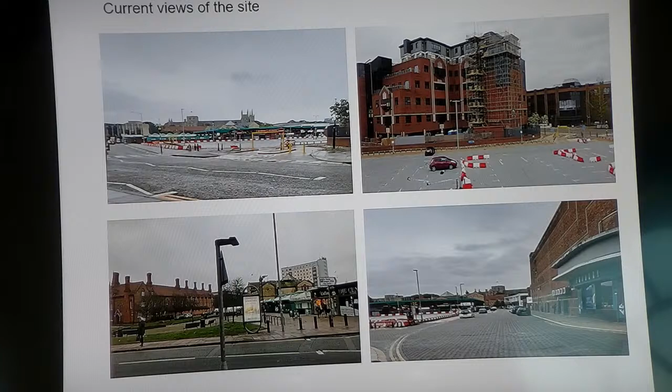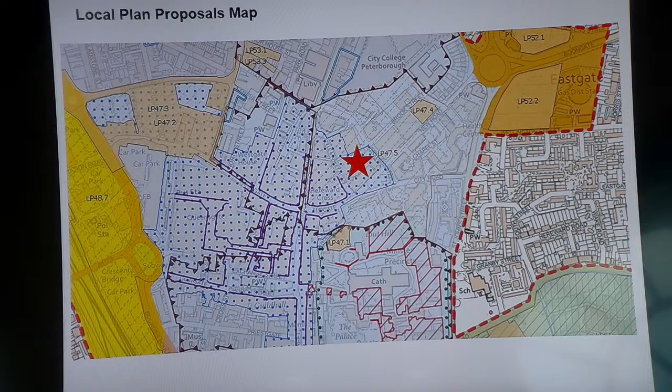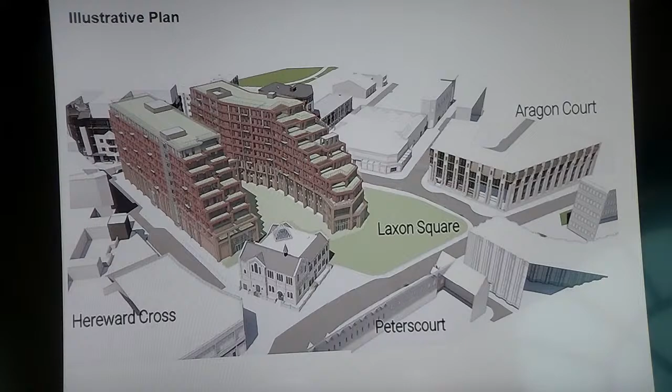This illustrative plan is displayed to give you an appreciation of the form of the building before we look at it in more detail. What you can see here is that the proposed new building, although this is illustrative as it is an outline application, would comprise two wings, with a stepped elevation, stepping from north to south and reducing in height. The stepped nature of the development would allow for terraces to residential flats and also to roof gardens.

This next slide shows a vertical limitations parameters plan. As mentioned before, this is an outline application with only access for consideration at this point, in addition to the principle of development. Further details of scale, massing, landscaping and materials will follow through subsequent reserved matters applications. But in order to control the height and limits on the height of the building, the applicant has submitted a parameters plan, setting out the maximum height of the building and also the number of stories.

This plan shows that it would be a 10-storey building with a height of 33.25 metres. There would be an increase to accommodate the lift and the headroom for the lift, giving a maximum height at that point of 35.25 metres.

In the plan, the very dark blue squares on the roof represent the areas for lift shafts and the headroom to accommodate those. The blue areas they sit on represent the maximum 10-storey height, 33.25 metres. Connecting the two wings of the building would be a three-storey element, 11.2 metres.

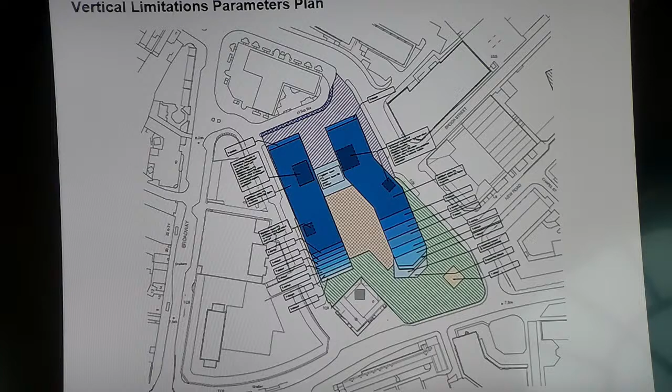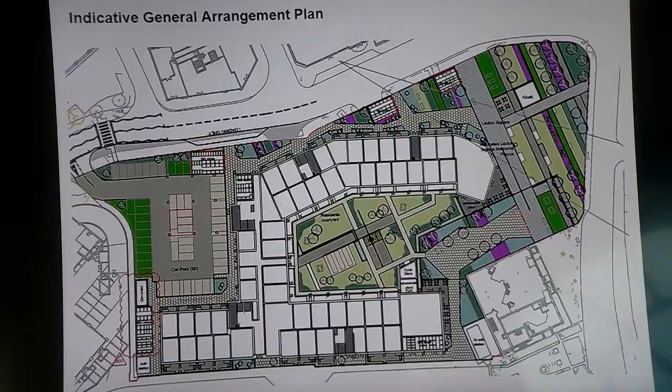I'd also point out that this application includes a range of different housing types: 20% one-bedroom flats, 27% two-bedroom four-person flats, 25% two-bedroom three-person flats, and then some larger units - 15% three-bedroom flats, 7% townhouses, and 6% maisonettes. This differs from other flat developments within the city centre, which predominantly tend to only provide one or two bedroom flat units.

Okay, moving on to the next slide. I'm now going to take you through a number of cross sections and views that look to assess the building heights as part of this development.

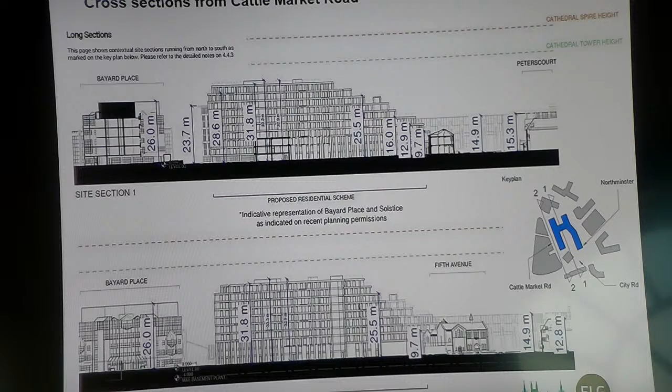The first slide shows a cross section including the existing development we saw in one of the aerial photographs, known as Bayard Place. On the top part of the slide, that's the building located to the left. You can then see the proposed development stepping down in height towards Laxon Square.

For those listening closely, the heights on these drawings show that the maximum height of the 10 storeys would be 31.8 metres. On the parameters plan I showed previously, the maximum height for 10 storeys would be 33.25. These plans are showing an illustration of the development - the fixed points in terms of height relate to the parameters plan, and a slightly different height has been shown here as this is illustrative, with a little leeway allowed within the parameters plan should each individual storey height change slightly. Over a 10-storey development, an increase of even 10 centimetres per storey can add up, so the parameters plan makes allowance for that. These are illustrative plans, but I think they give a good representation of the overall height.

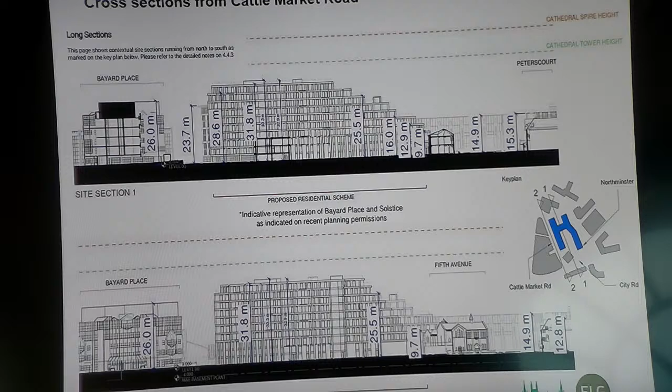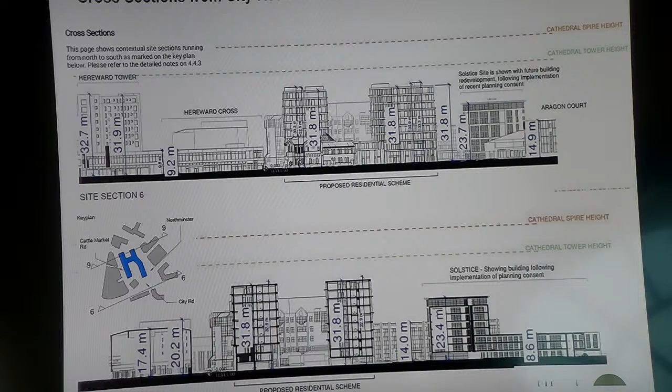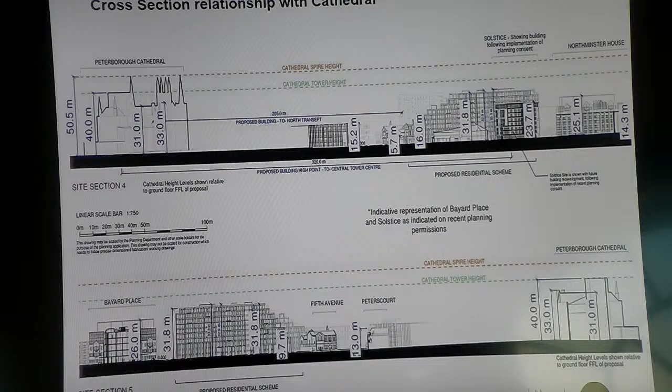Turning to the next slide, I'm now going to take you through a number of views. These views have been identified in a heritage impact assessment prepared by the applicant, and agreed with the Council's Conservation Officer and Historic England. They also take into account views identified by the Civic Society.

The next slide shows that building, which has reduced in overall height and form as a result of the two-storey reduction in height of the development since the pre-app stage. The line outlined in red shows the outline of the Solstice, which was approved by committee some months ago. You can see here how views of the cathedral tower and spires will still be retained from Stanley Recreational Ground, albeit with the Solstice development in the foreground and the proposed development behind.

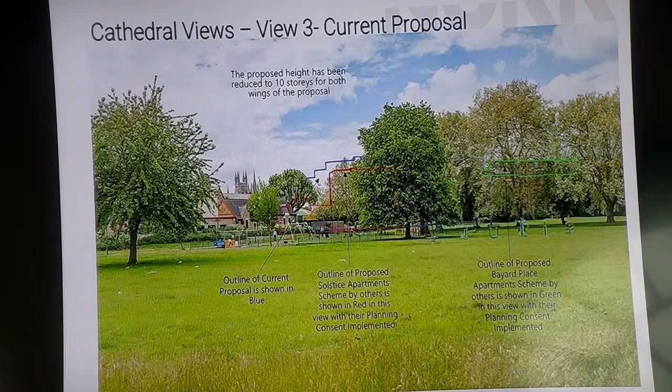The next slide shows how that outline has reduced in height, as a result of input from our conservation officer and also Historic England, who were concerned about the heights of the building, and they have been reduced in height.

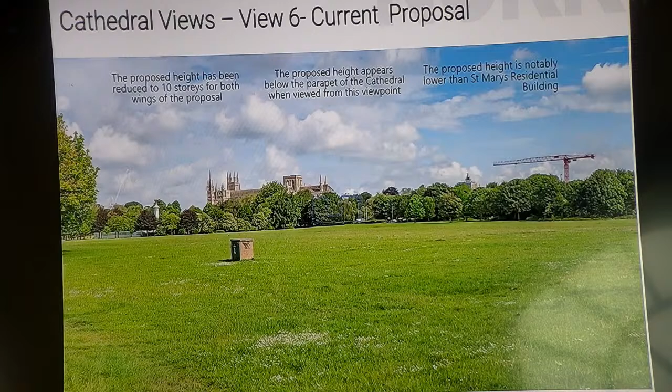The next slide shows that very much reduced, so it is within the tree line. Historic England advised the council that the outline of the building should not exceed the parapet of the cathedral. This is the parapet of the roof - it's lower than the spire, it's lower than the tower, it's lower still. This means the impact of the building would be negligible in terms of its views towards the cathedral.

The next slide shows views from the eastern side of the embankment open space, with the cathedral very prominent here. This is the July planning application before the building was reduced in height.

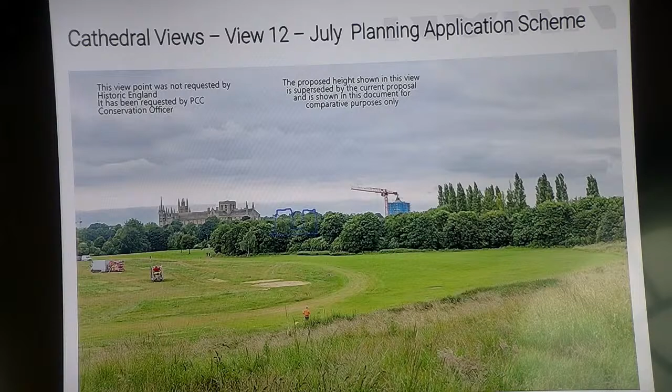The next slide shows that as it's currently proposed. Again, you can see how the reduced height keeps the building within the line of the trees and doesn't impact on the views of the cathedral.

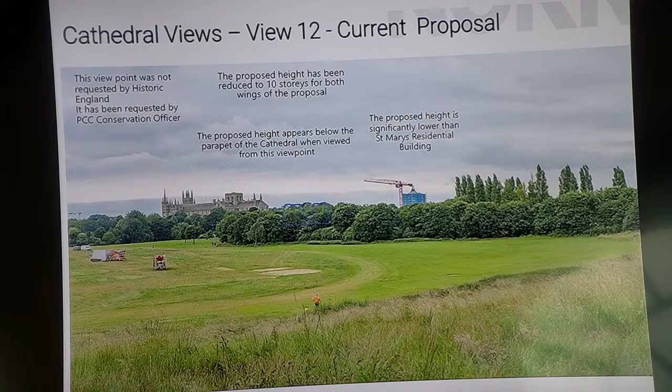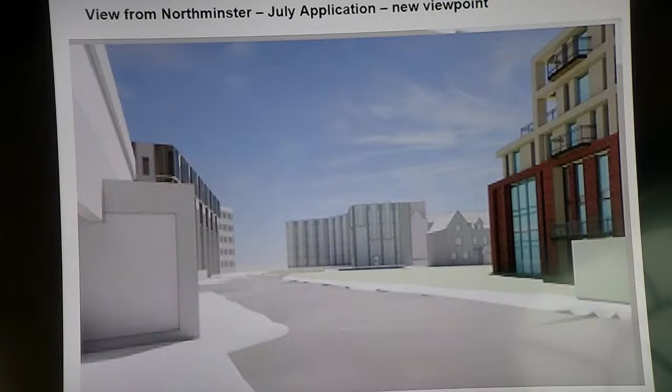The final two slides I have for you are taken from Northminster. This is a view taken from the northern part of Northminster, looking south towards Tout Hill. The next slide shows a view from slightly further south.

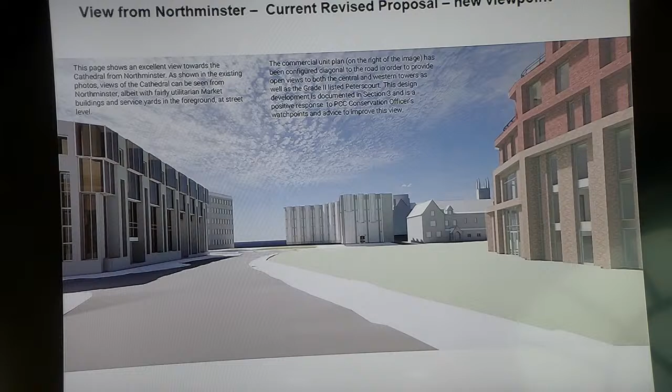Okay, the next slide. As I mentioned before, access is one of the detailed matters for consideration today. So I'm going to take you through the access and the off-site highway works.

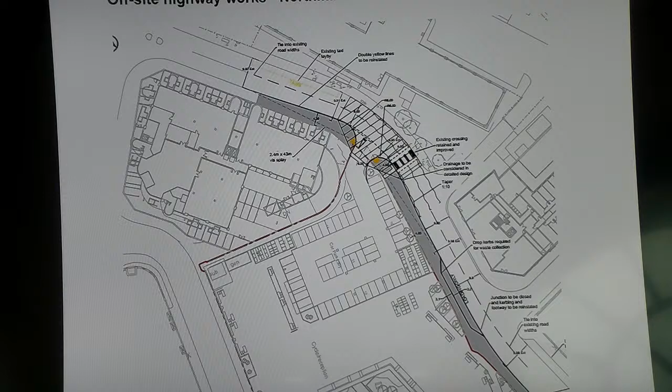The proposal shows there would be a new access from Northminster in the northeast corner leading into the car parking area, and there would also be a loading bay on Northminster itself. The next slide shows a further loading bay again on Northminster.

In terms of Cattle Market Road, there would be some adjustments to the loading bays and parking areas in order to achieve access for refuse vehicles to the site. The next slide shows some changes to the location of the disabled parking.

In the update report that you have in front of you, there have been various amendments made to the detailed highway plans, at the request of the local highway authority. They now provide further clarification on visibility splays, curb radii, the location of the loading bays, drop crossings, carriageway width, impact on disabled car parking and footways.

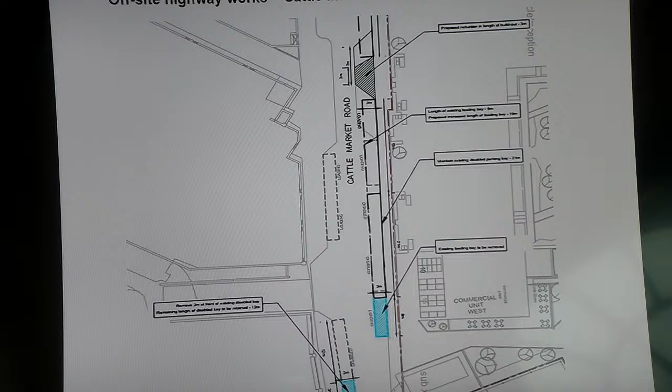This will improve the area for pedestrians and cyclists and will also allow for the proper servicing of the site, both in terms of the residential units, online deliveries for example, and also servicing to the commercial units, while maintaining an acceptable level of highway safety. As a result of these changes, there is no objection from the local highway authority, from the drainage team, or from the waste team.

Now, the scheme also intends to improve the public realm around the development. This slide shows an illustration of what proposals might look like for the residents' courtyard. This would be the area solely for the use of residents within the development, contained between the two wings of the building.

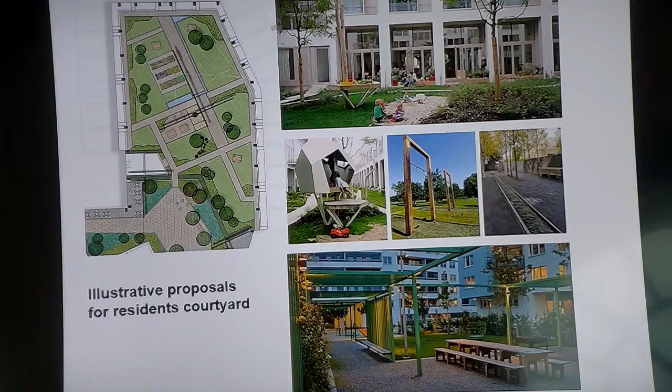The next slide shows the wider improvements to the Laxton Square area and some ideas about how that might be improved. I would point out that the Council's independent urban design and landscape advisors raised no objection to the scheme.

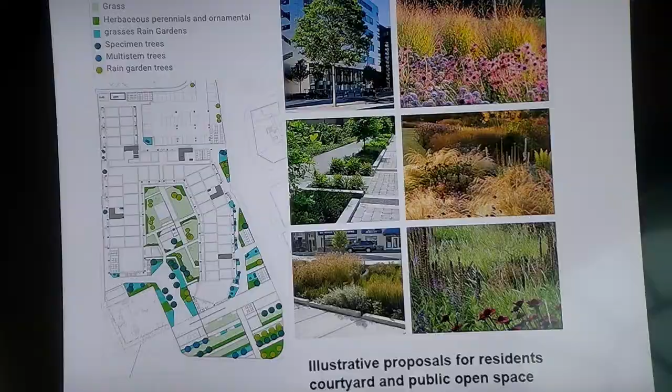Turning to the next slide, we have an illustration of what the development might look like from City Road.

As you'll see from the committee report, first of all, in relation to the principle of the development, an opportunity area for Northminster has been established within the local plan. It provides no limit on the number of dwellings for this area. The proposal in front of you comprises a mix of residential, commercial and open space that we consider reflects the market circumstances at present and will result in redevelopment of a rundown area.

In terms of the market, that will be relocated to a new location on Bridge Street. That will be undertaken by the council under a separate project, and there is a separate process underway to relocate traders to that new location.

In terms of meeting housing need, as mentioned previously, this would be a build-to-rent scheme that provides for discounted rents at 80% of local market levels. It would be a 100% affordable housing scheme, and it would be supported by a grant of £14 million from the combined authority. The purpose of this grant is to enhance the affordable housing provision from 30%, which is the requirement in our local plan, up to 100% of the scheme. Therefore, this will result in a clear benefit to the city through the delivery of affordable housing.

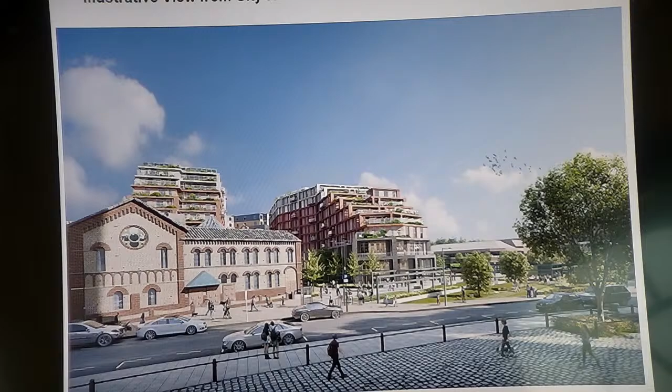Turning to heritage, I've taken you through the impacts in some detail already, but I would point out some key points. First of all, there have been amendments to the scheme from first submitted that are now acceptable to Historic England, who are a statutory consultee, and also to the Council's Conservation Officer. The views to the Cathedral and on Peterscourt, which are two listed buildings, have been minimised to a point that we now feel are acceptable.

We also consider that there be improvements in terms of improving the street scene around Northminster and Cattle Market Road, and also enhancing the public realm at Laxton Square, therefore opening up views and new spaces from which to appreciate the cathedral from views from the north.

It's also noted that impacts on views from Stanley Rec, which have been one of the concerns of the Civic Society, should be seen in the context of the redevelopment of the Solstice, which has been approved.

Looking at appearance, scale and design, these are all matters to be considered under reserved matters applications. But the illustrative plans that I think you've seen, together with the parameters plan that will control the amount of development, shows that the site could accommodate up to 315 flats.

I think we can see that the buildings would be of an innovative design for Peterborough, and despite the fact that it would have a maximum 10-storey height, the scheme has been designed in such a way that it would step down to the more sensitive areas of the site and to a more human scale around Laxton Square. That shows how the development has the potential to respond well to its surroundings and also set a standard for future development in this area.

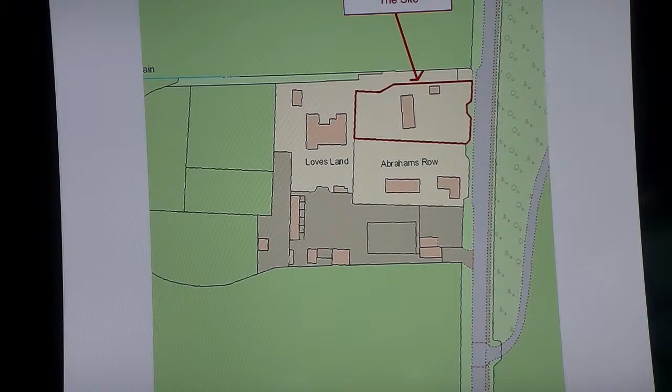And the application before members today is to replace that static unit with a brick-built dwelling, still to be used by a Gypsy and Traveller family. So this next slide shows the location of the site in respect of the settlement boundary of Eye Green as identified in the Peterborough adopted local plan. And because it sits outside of the settlement boundary, the site in question is said to be in the open countryside, though I do appreciate that there are buildings around the application site, but in terms of the local plan it's deemed to be within an open countryside location.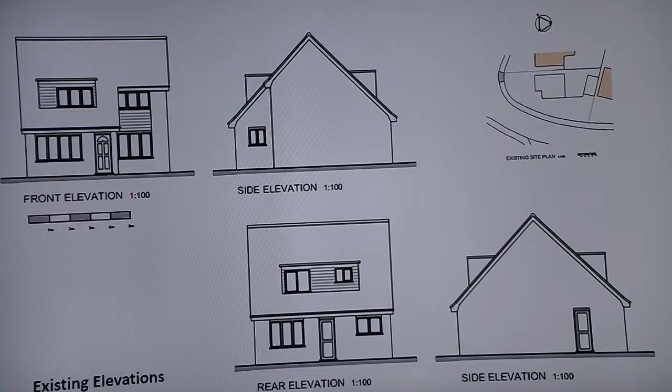The second part of the proposal is a side extension which starts where you can see the existing cut back on the front elevation, again two-storey with a flat roof, and then to the rear there's a one-storey flat roof extension. If we go to the next slide, you can see each of those elements.

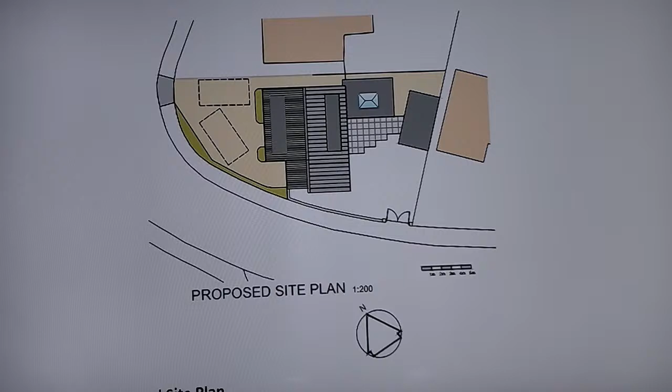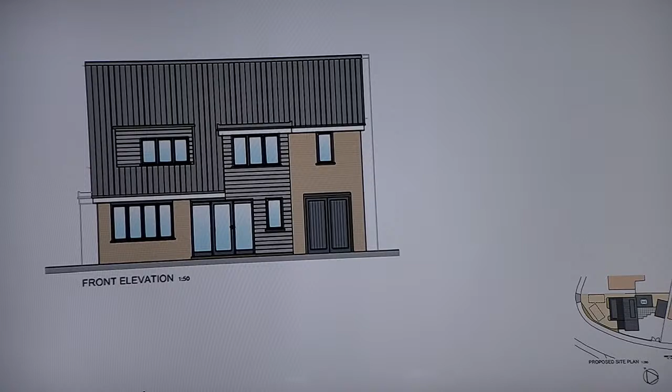So this is the front elevation, and you can see the floor to ceiling windows, triple windows. That's the front entrance to the dwelling, and above there you can see the first floor extension. So that section there infills the recess on the original dwelling. And then to the right of that, in the brown shading, you've got the side extension, which is set back from the front extension.